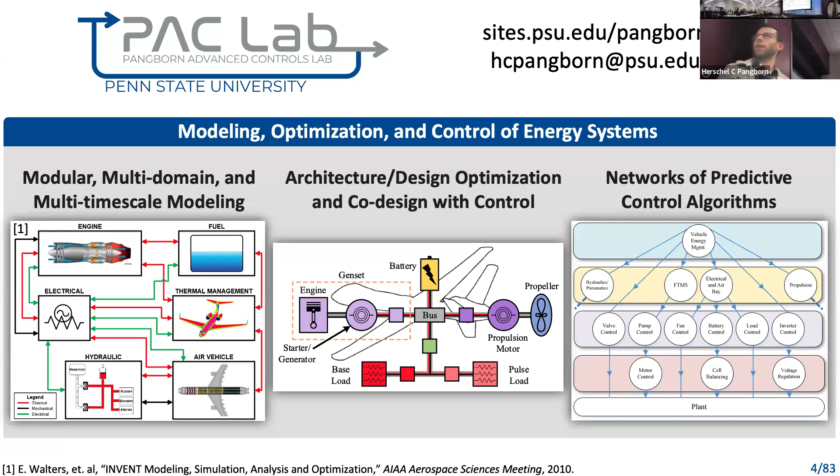We often find that these systems are so complex that we can't just have a single control algorithm that makes all the decisions for all the actuators. That's where we have hierarchical control approaches that take networks of algorithms integrated together to collectively make decisions. On the modeling side, a technique we found particularly useful is graph-based modeling. Think about a system like the one in the top left, a hybrid electric aircraft propulsion, power, and thermal management system, a notional architecture.

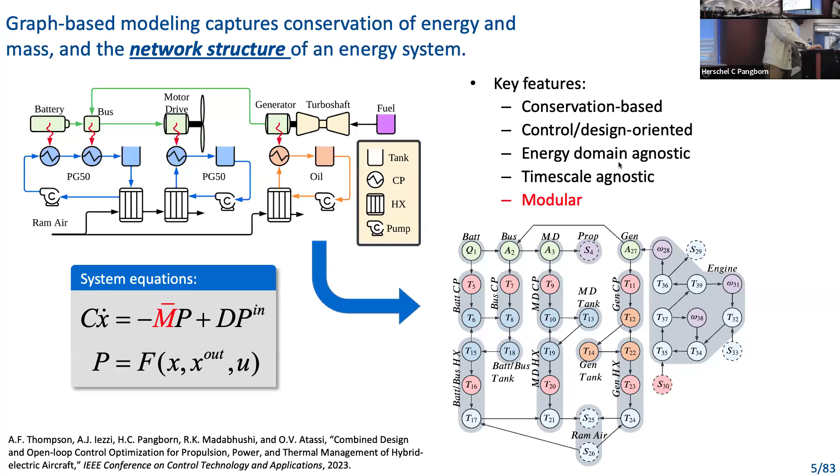Anywhere you store energy, you put a node in the graph, and anywhere you transfer energy, you put an edge. That energy could be electrical, mechanical, thermal. It doesn't really matter; conservation of energy applies in the same way. Then we get this nice network equation that describes how the energy is stored and transferred in the graph. That red matrix M is the incidence matrix that tells you about the structure of interconnections. We can exploit this knowledge of both the system dynamics and their structure in a number of really interesting ways.

We do apply control to these systems quite a lot. A lot of what we do is model predictive control. I won't talk about that too much because most of you understand how MPC works. You take a dynamic model, linear or nonlinear. You define a cost function; when the cost function is small, the system is performing well, whatever well means. You define inequality constraints on what safe operation looks like. Then you solve the minimization problem subject to the model and the constraints. And we use this to control energy systems.

Here's an example. This data was actually taken here at Purdue. When I was a graduate student at Illinois, there was a center here that we collaborated with, run by Tim Fisher. So I drove the 2 hours or so over here, right?

We popped an MPC controller on this test bed that was down at Zucrow Labs at the time, got some really nice data that showed that MPC worked well. That's the fastest I've ever gotten a controller running on hardware. So you must all have good luck doing that here, because it has not always gone as smoothly for me in other places, but it worked nicely.

So what you're seeing here is we have a heat load as a disturbance to a thermal system, and we're controlling a flow rate to cool the system off. And when you use a conventional controller, you basically wait until the system starts getting hot, and then you ramp up the pump, and by then it's too late to avoid a really severe temperature excursion beyond a limit.

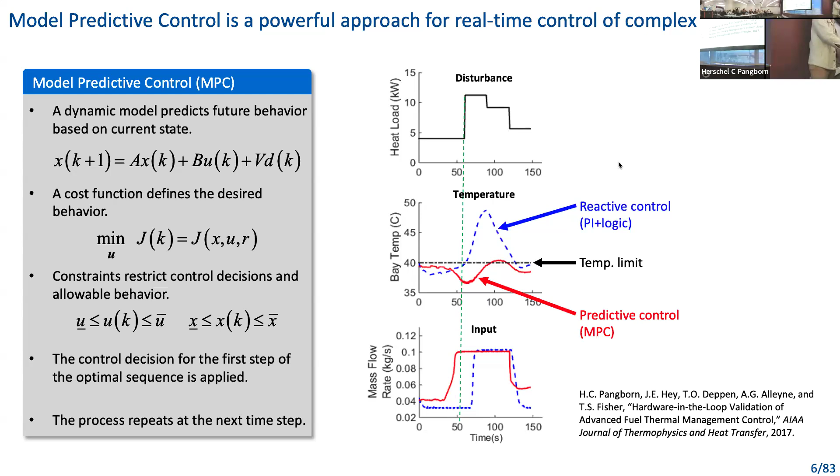But if you use predictive control and you have some expectation that that load is going to come, then you can ramp up the pump in advance, pre-cool the load, and do a much better job of respecting the thermal constraint. Another thing we've been working on at Penn State is confronting the nonlinearities in these systems.

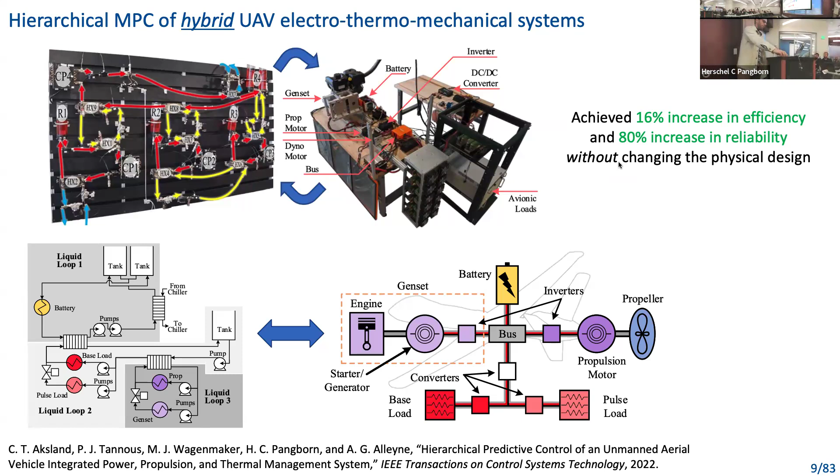And then here's the design one. So for this, we modeled a hybrid electric aircraft, and then we solved a co-design problem to both choose how to do the power split between the engine and the battery, as well as how to control the flow rates for the cooling systems. And we did those control optimizations together with sizing components. So we were sizing the battery, we were sizing the heat exchangers.

Obviously, bigger components help out with the power and thermal management, but they also have a mass penalty, so then it takes more energy to fly the mission plan, right? So we looked at some different configurations, basically looking at different efficiencies and energy densities for batteries, looking at trying to penalize fuel expenditure more than consuming other energy. And you can basically see how for different model assumptions and different objectives, the optimal design changes.

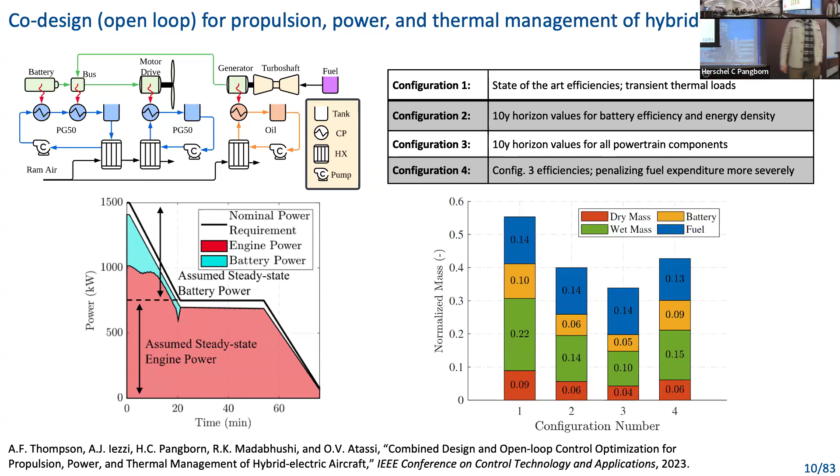All right, so that was a quick overview of the things I'm not going to get into further detail on with the talk.

What I really wanted to focus on is this theme around set-theoretic methods for safety-assured autonomy. So we'll talk about some offline verification of closed-loop systems. Then, as dessert, we'll talk about some online motion planning and show you some cool videos of robots.

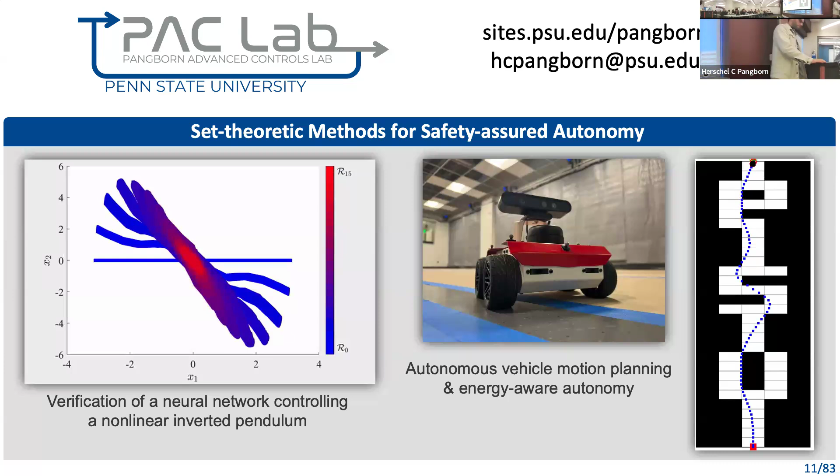So in terms of offline verification, I want to frame this in terms of reachability. So the idea of reachability is, imagine you have a dynamic system, right? Maybe it's a fixed-wing aircraft, like we have a cartoon of on the left there. And that system's going to leave from some initial set, any point in that initial set, and you'd like it to get inside of some target set. And along the way, there's some unsafe set you want to stay out of, and maybe some bounded disturbances that can hit you along the way.

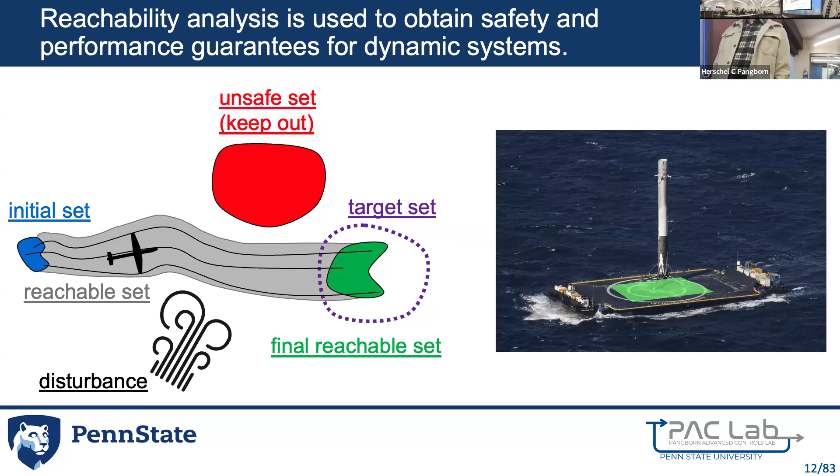And so the idea of reachability is to basically calculate the tube of all trajectories that the system will follow, right? And that's that gray tube that you see. And ideally, you'd like to be able to prove that your system is safe, meaning that you don't enter your unsafe set, no matter what the disturbances are. And you'd like to have some proof of performance that you get inside of some target set, right? Your final reachable set is inside some maybe landing zone.

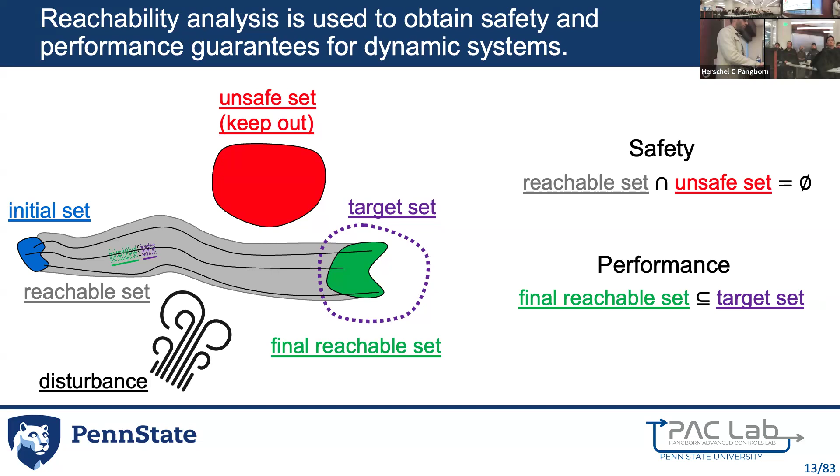And one way to approach this, and I think this is the most common that one might use conventionally, is you just run a ton of simulations, right? You hope that if you run enough simulations that if there was anything that was going to be unsafe, you would see that in one of the simulations, and then you'd know. But of course, this is not exhaustive, right? Just because you haven't found a simulation that's unsafe doesn't mean some other one doesn't exist.

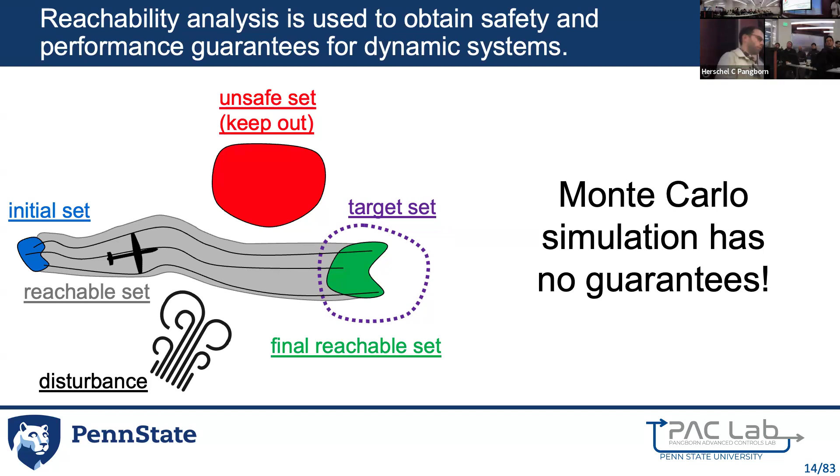And there are certainly other ways of doing sampling and stochastic approaches that might be able to provide some probabilistic guarantees, but just kind of blindly running a bunch of simulations is not a way to verify safety. So instead, what we want to do is calculate sets that bound these trajectories. And so here's an example of forward reachability. So we have some nonlinear system in discrete time. The state update is given by a function f. It's a function of states, inputs, and disturbances, where the inputs and disturbances are bounded.

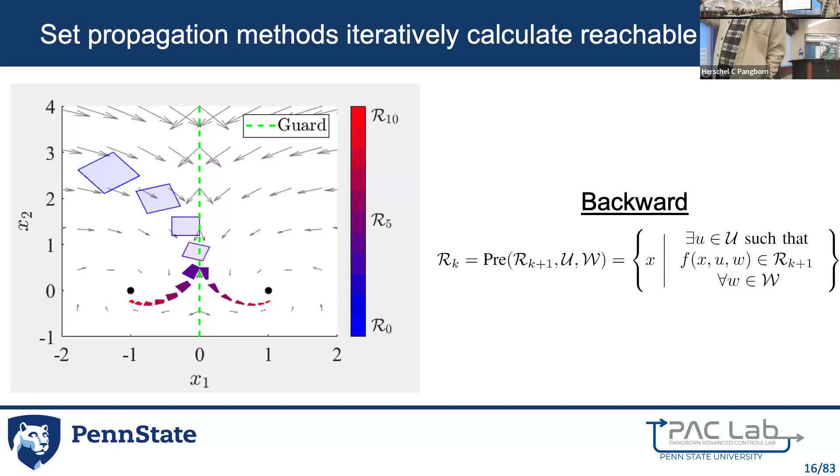And if you can do this forward, you can do it backwards as well. So I can define a predecessor or precursor set, where now I start in the set at step k plus 1, and this maps me backward in time to the set at step k. The way you handle disturbances and inputs here is a little different, but you can get the intuition behind it. You see in this case, if you start close to the equilibria and then go backwards, it turns out you can actually reach those equilibria from either side of the guard. So you get a bigger set in this case when you go backwards than when we went forwards.

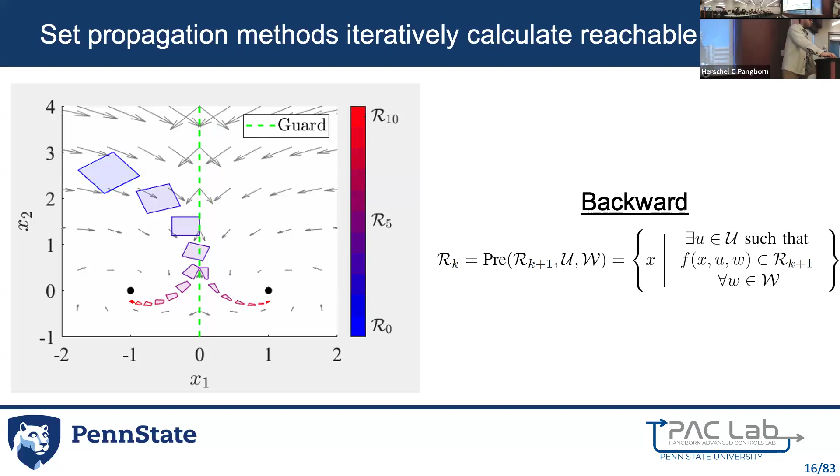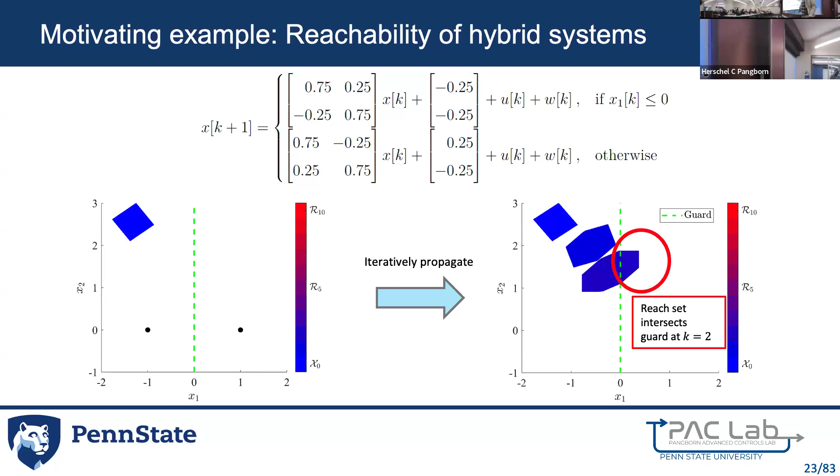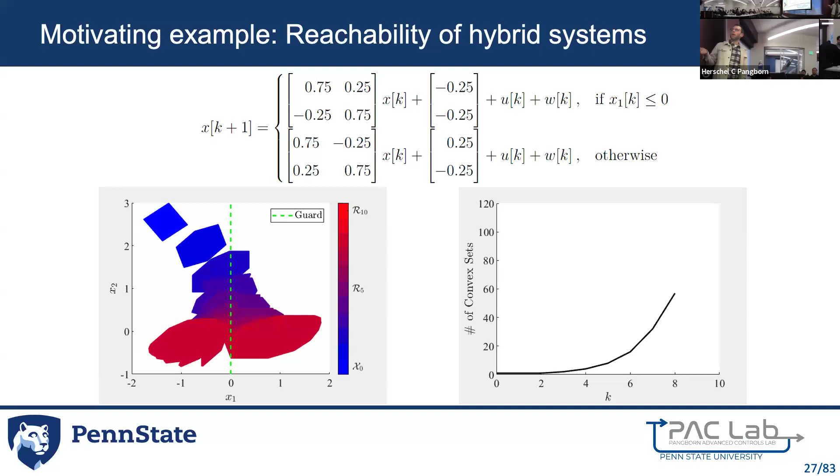So what do you do? Well, one thing you can do is you can just basically split it into two pieces and propagate each piece separately, right? So now we have two sets to keep track of, and we propagate both of them. But unfortunately, both of them cross the guard the next step. So, okay, we'll split them again. Now we have four to keep track of, and we'll propagate them again. And you can kind of see the problem, right? The number of sets I have to keep track of grows exponentially. So I have to store all those in memory, and I also have to propagate all of them through the dynamics every step. So it starts to affect both my memory and my computational complexity.

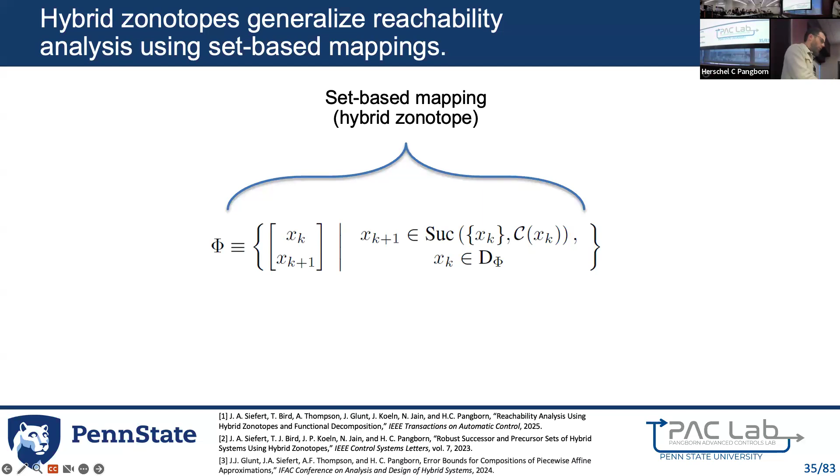All right, so how do we do all these things? Well, the key that we found is really useful is to think about building hybrid zonotopes as mappings of dynamic systems. So for example, we could take a particular system and define this set that basically stacks states at step k on top of states at step k plus 1, where the ones at k plus 1 are the successor set of some system, potentially with some controller in the loop, and that's valid within some domain. So through its dimensions, this set would basically map you from one step of a system to the next. And this could be an open loop system or closed loop. I'm showing a closed loop formulation here, but that's not required.

And what's nice is once you have that set, you can use these really efficient set operations to actually perform the reachability analysis. So I can take some initial set of interest at step k, do a generalized intersection with my map, and then a linear mapping onto the dimensions at step k plus 1, and I can see where that set will go at the next time step. And these operations actually scale linearly with the dimension of the system, and as you go, you build up more memory complexity in the set, but that scales linearly as well. And we can do some order reduction along the way if we want to try to combat that.

What I'll show you in a couple slides is how we can handle higher dimensional systems by doing some clever things with functional decomposition as well, right? So that helps to support scalability.

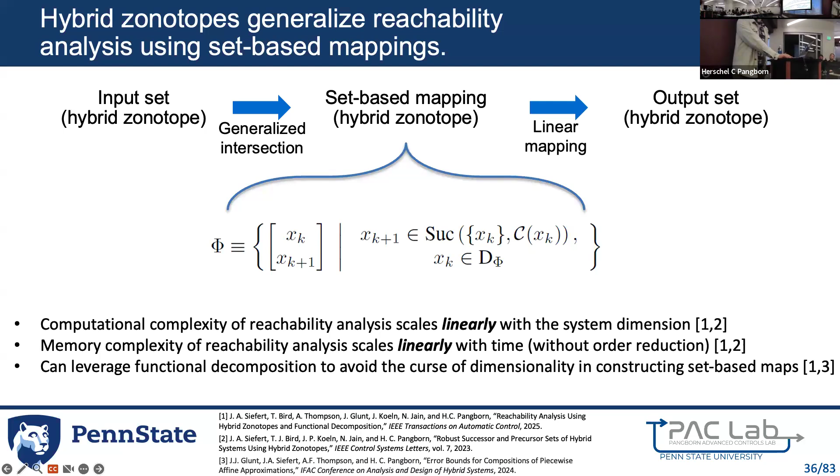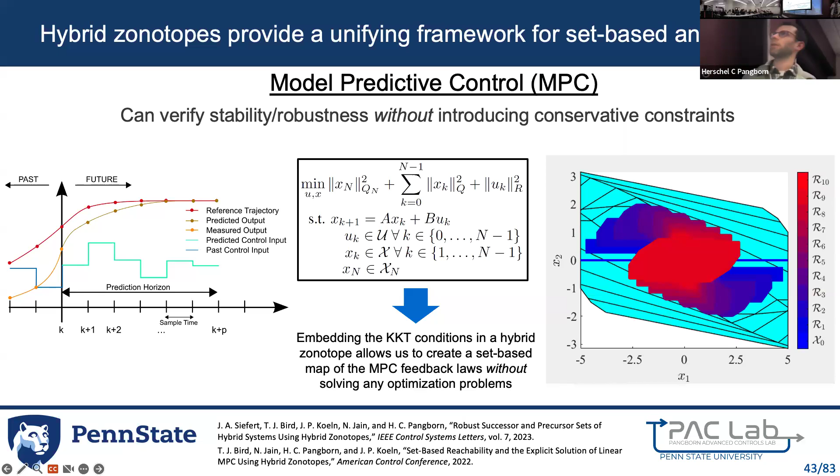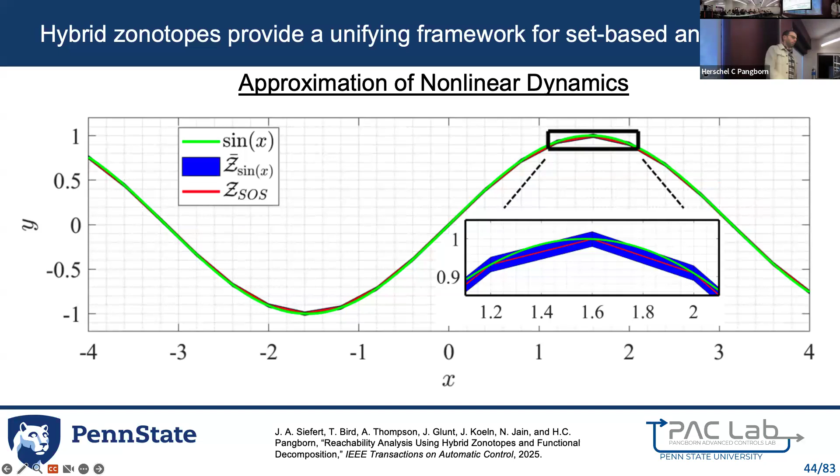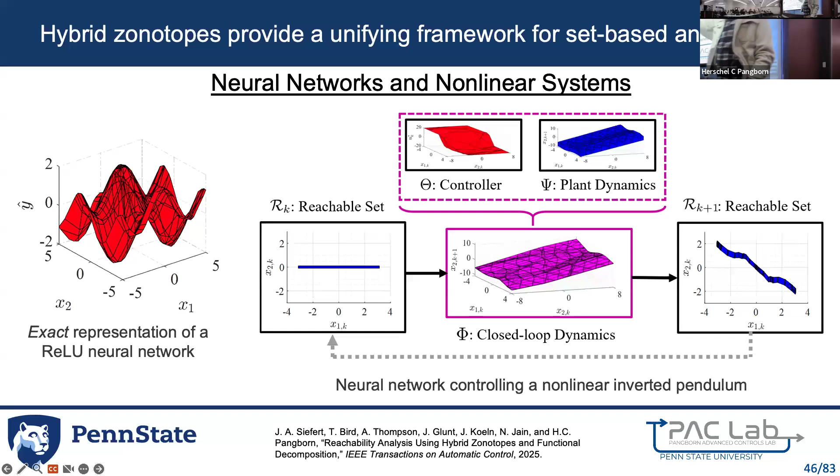So to show that in action, we'll take a classical control systems example of an inverted pendulum. We trained a neural network to mimic nonlinear MPC in stabilizing an inverted pendulum. We built that set mapping for the pendulum itself as a function of the control input. Then we took our trained neural network and expressed that also as a hybrid zonotope. Again, in this case, we used a ReLU neural network, so we could represent the set-based mapping of the controller exactly. Then you can couple those two maps together into a map for the closed loop dynamics, do reachability of this closed loop system, and see that the pendulum actually is nicely stabilized to the origin. This propagation in every time step takes about 5 milliseconds.

But then again, if we want to analyze the set, we have to confront the mixed integer optimization. So, for example, if I just want to bound it in a particular direction, solving that takes about 2 seconds.

It turns out that this neural network stabilizing an inverted pendulum is actually a benchmark problem for this friendly competition in reachability analysis called the ARCH competition. Basically, it's a series of benchmark problems. A bunch of folks all over the world get together every year, try taking their tools and solving these benchmark problems, and then write up a nice report that compares how they performed. So we solved that benchmark problem.

What we found that was interesting is if we use a really small initial set for the pendulum, the other tools that solve this benchmark actually tend to do better than ours. Our proposed method for a small initial set took 312 seconds. I should say all these numbers are seconds. But some of these other ones take half a second or less. But if we make that set bigger, our approach still works, and the other ones all basically explode. That's because they're just not able to get a tight enough approximation of the pendulum dynamics.

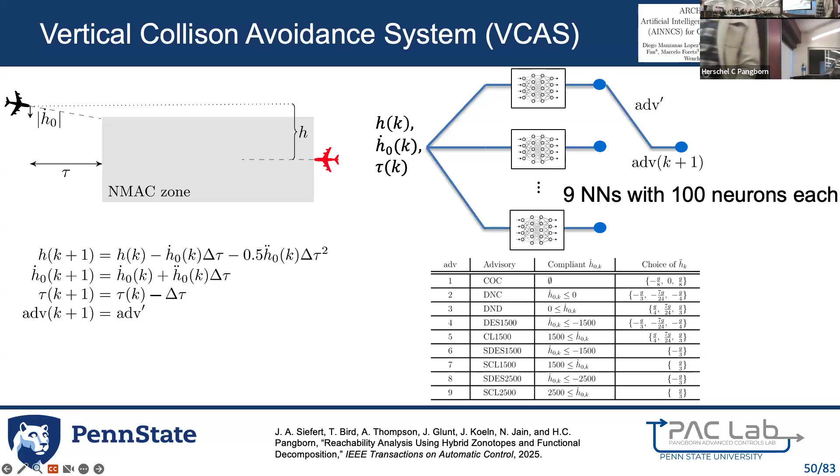So there's 9 neural networks, each of which has about 100 neurons, and those are providing a set of advisories. They're basically voting on advisories, and then one of those neural networks wins out. And then once the advisory is selected, the pilot has a set of choices that they can make about how to fly the airplane. So this is a combination of neural networks and also some logic, and some uncertainty in which choice the pilot might make.

And we are able to show in less than a second that, in fact, this system is unsafe, and it'll violate the requirement on the separation distance between the aircraft. And we do this again by building one of these set-based mappings that captures all these things. Because hybrid zonotopes are nice and generalizable, we can capture the neural networks and the logic and the system dynamics all within the same representation.

The other tools that have tackled this problem don't have that same level of generality. And so they have to break the problem up into smaller pieces and handle them separately.

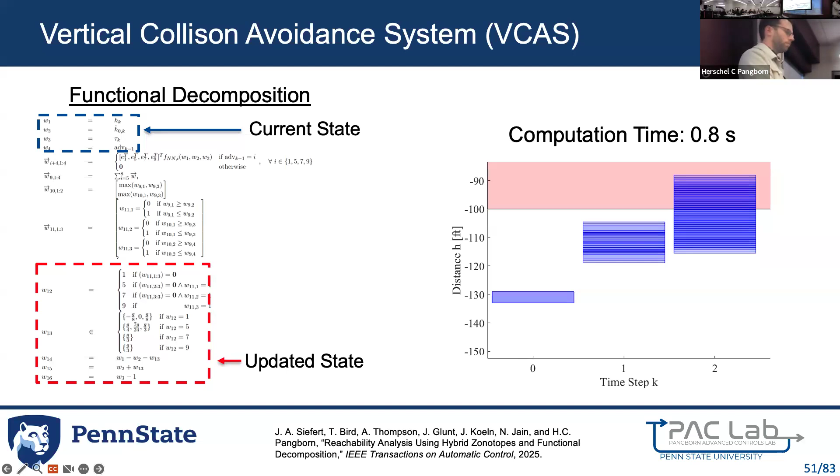So that was all offline verification. About a year ago, I started thinking about whether we might be able to use this online in some useful way. So offline, you don't necessarily care how long it takes to compute things. As long as you can get an answer, that's fine. But online, the goal is to see if this can accelerate the speed of decision making or solve problems online that we wouldn't be able to solve otherwise.

And we thought a little bit about what a good particular application to start with might be. And we settled on motion planning for autonomous vehicles. So you think about a vehicle driving around, trying to avoid obstacles. Those obstacles form a non-convex obstacle field. So other cars on the road, or some other obstacles on a map, that creates non-convexity.

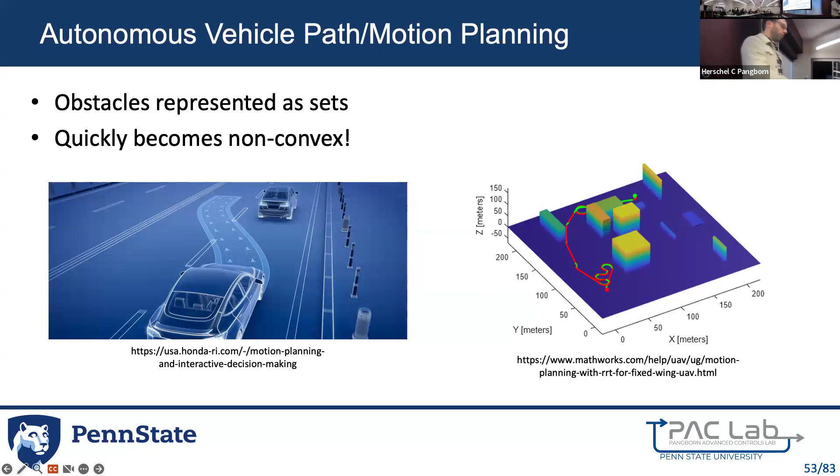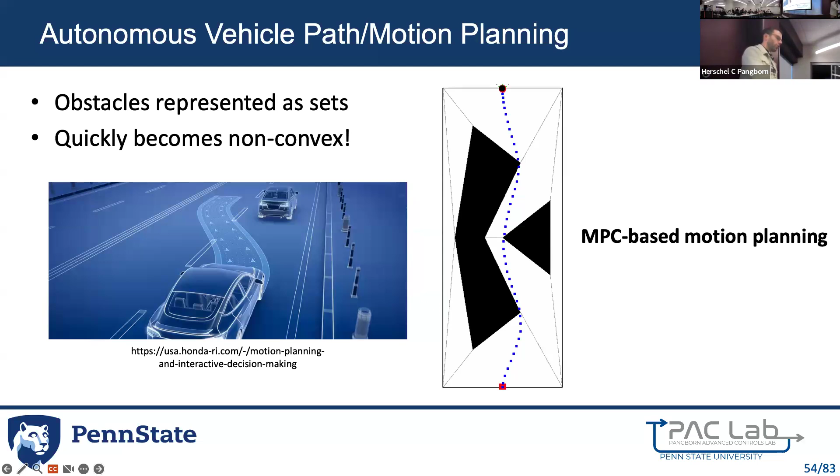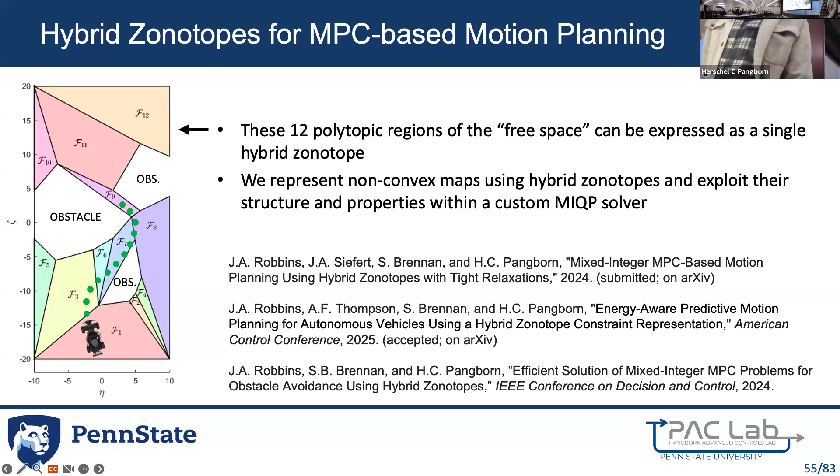So let me walk you through this. So again, what we do is we find basically the free space where you're allowed to be. We represent that as a single hybrid zonotope. And then we wrote our own custom mixed integer program solver that exploits the structure of how this optimization problem looks when you use hybrid zonotopes. And so we've written a couple papers on there. One was in CDC late last year, and the other two are on arXiv if you want to check them out.

Another really common map representation is occupancy grids. And so in this case, you just grid up the space. And any one of those grids that has anything in it, you say is a no-go zone. And then you're left with the grids you're allowed to be in. What's nice about this is that no matter how big the grid is, you always just have two continuous factors and one equality constraint. And then just the number of binary factors will change as you have more cells that you're allowed to be in. So we can represent these grids super efficiently as hybrid zonotopes.

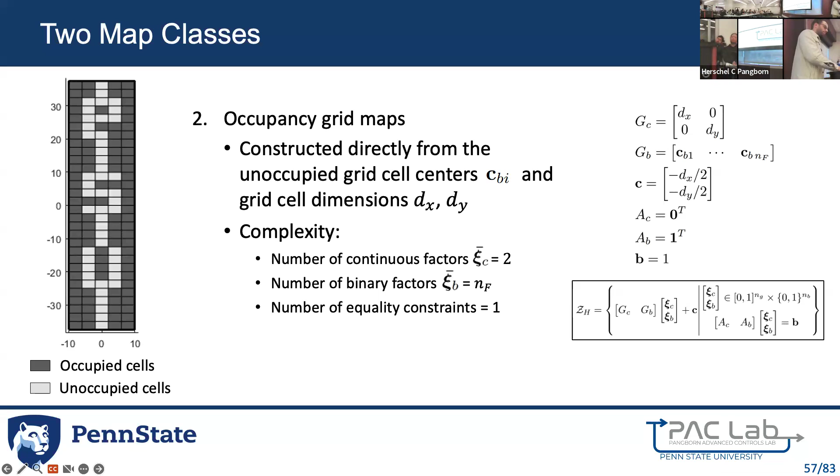Now, what's, again, really nice about these hybrid zonotopes is that when you put them into mixed integer programs, the way that branch and bound works is it relaxes binary variables, right, and then solves quadratic programs subject to that relaxation. And when you do that relaxation, if you get a tight relaxation, then you get a nice bound in your quadratic program subproblem. But if you get a coarse relaxation, then you get a coarser bound, and it takes longer for the overall optimization algorithm to converge.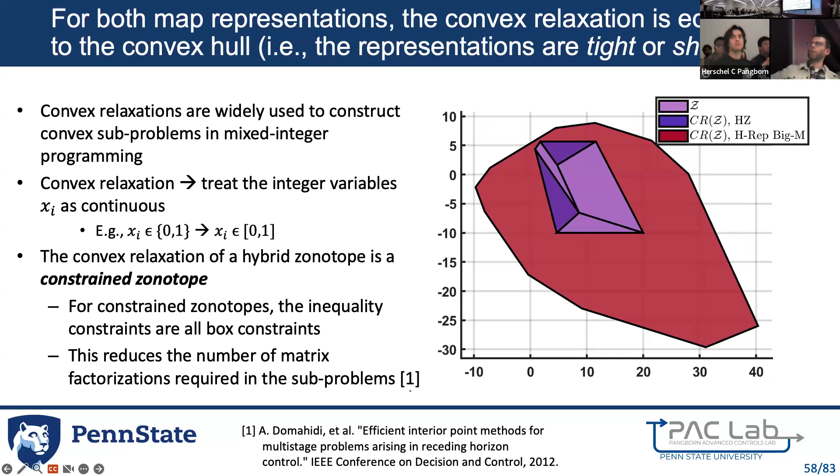If you use big M, which is a more conventional way of taking unions over convex sets, when you relax that, you get this massive red set, right? And that, again, leads to a much worse bound inside of the optimization algorithm. The other thing that's nice is when you do that relaxation, you take your hybrid zonotope and it becomes a constrained zonotope. And then constrained zonotopes, right? The inequality constraints are just boxes. And that winds up benefiting you when you get to these quadratic subproblems. Basically, instead of having to do matrix factorizations, you get a diagonal matrix that you can easily invert. And so it makes the subproblems of the branch and bound algorithm go much faster as well.

Then the other place where we found some computational benefits was in leveraging the context of this motion planning problem, right? So you have a binary variable associated with each of the free space regions that the vehicle is allowed to be in, and you can kind of limit the sequencing of when those binary variables are going to become active just by knowing the topology of the map. So if I know the maximum speed of my vehicle, then I know I'm not going to jump from being in a region that is really close to me to being one that's really far away from me without having to take a couple time steps in between. And so we can constrain the branching just based on the region to region reachability of the vehicle.

And this is not like a dynamic reachability like we were talking about earlier. Here, when I say reachability, I literally just mean bounding the vehicle speed and then looking at the shortest path, both from one region to the other and also from the vehicle to the different regions, right? So we use that basically within the heuristics of the branch and bound algorithm to get some further computational benefits.

So I'll show you examples for 5 different maps, right? The one on the left has some convex obstacles. Then the next one in has a non-convex obstacle. Then we have a grid that happens to spell PSU for Penn State. Then we have this one where we have hard obstacles, but we also have regions that you can be in, but at a different cost. And I'll talk about that more in a second. And then to show that we can do 3D, we have a 3D grid. And here we're showing an MPC algorithm planning for all of those. The vehicle is the kind of black dot that's moving, and then that trail of red circles is the prediction horizon.

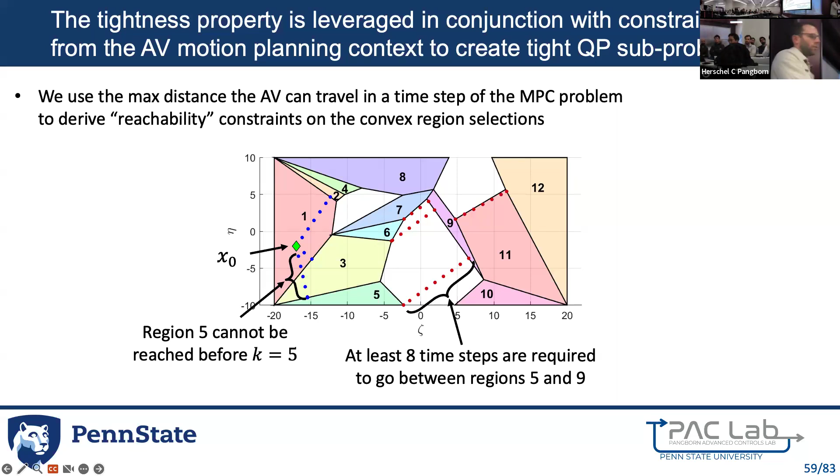You know, yeah, you know that before you start planning. Sure. Yeah. I'll show you an example where that's only partially true in a second.

So for these maps, basically, here's the computation times. The top set of bars is average solution time. The lower set of bars is maximum solution time. This is implemented on a desktop computer with a 15-step horizon. And then each set of bars going across is one of these different maps. So our methods are towards the left, with and without a warm start.

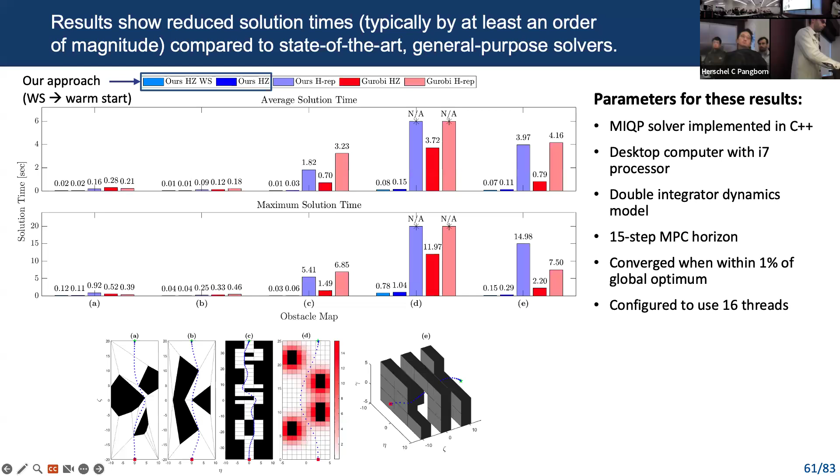And then on the right, we're using Gurobi, which is a commercial solver that is free academically, but quite expensive if you have to buy a commercial license. And we are, in some cases, 100 times faster than Gurobi, which was surprising to even us, right? Because Gurobi is a really highly optimized commercial tool.

And this tends to scale really well with the prediction horizon of the controller as well. So here we're just increasing the horizon from 5 to 10, then 15, then 20 steps. And you can see ours goes from below the rounding error, right? So the fastest one is 0.00 seconds. Obviously, it's not 0 time, it's just being rounded off. And then when you make the horizon 4 times longer, now it's 0.01, right?

Whereas you can see that Gurobi is increased by more than an order of magnitude. And I think, in fact, this one actually is just getting cut off because it's taking so long. Or maybe just the bar is getting cut off because it was out of the range.

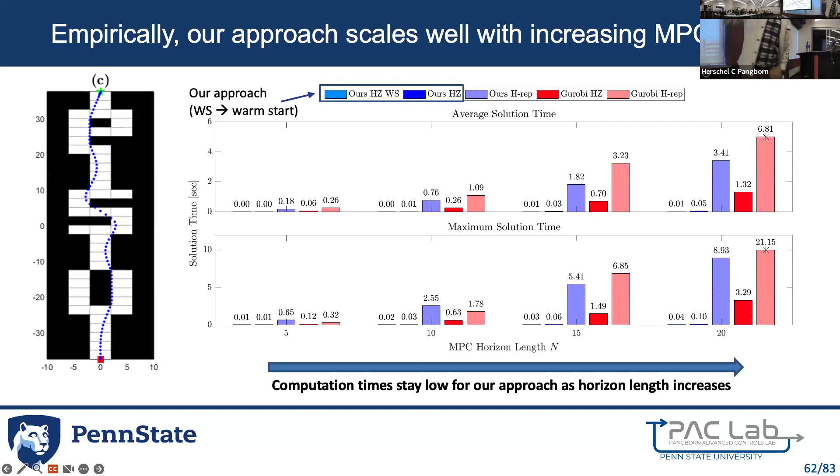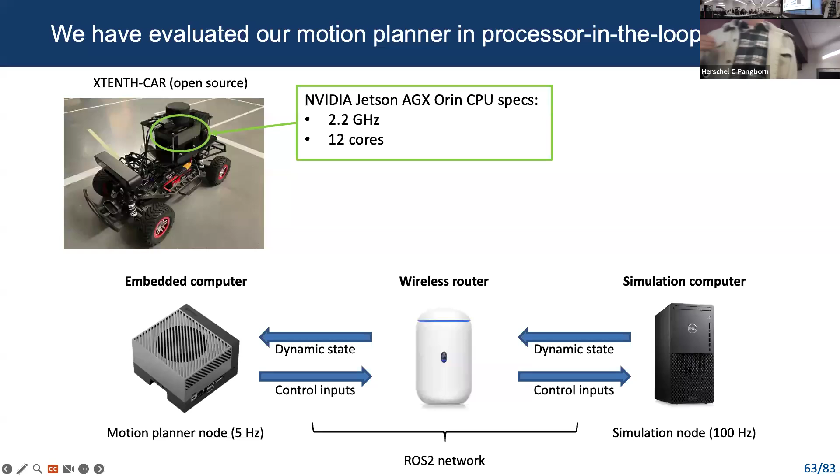We wanted to see how this would work on embedded hardware. So we bought an NVIDIA Jetson. So this is a pretty powerful embedded machine, but it fits on a robot. And in this case, we are just simulating the vehicle. So we're doing a processor-in-the-loop test, running a controller on the embedded machine, and then simulating it on a computer implemented in ROS. And this runs reliably at 5 Hertz with our ROS2 implementation; our solver is in C++.

And we get slightly different trajectories because we're basically capping, we're just getting the best solution we have after a fifth of a second. But the differences are basically negligible. Like, this obstacle in the U, you go around it to the left or to the right, it actually doesn't matter, right? So it's not a big deal that we're terminating the optimization a little early in that case.

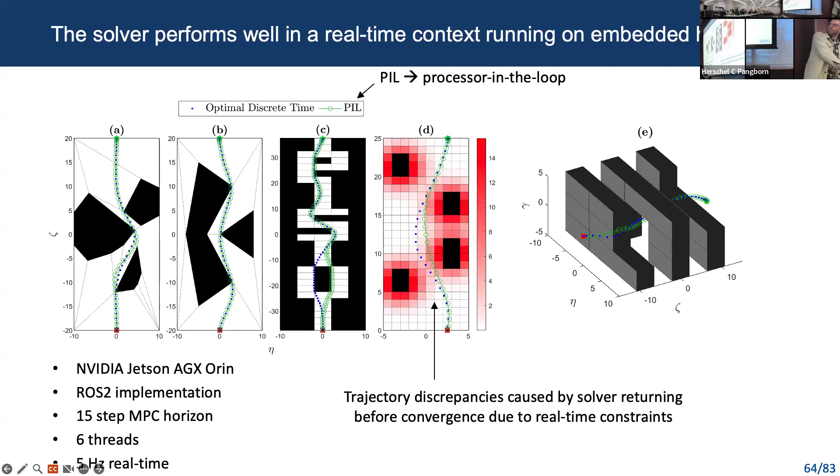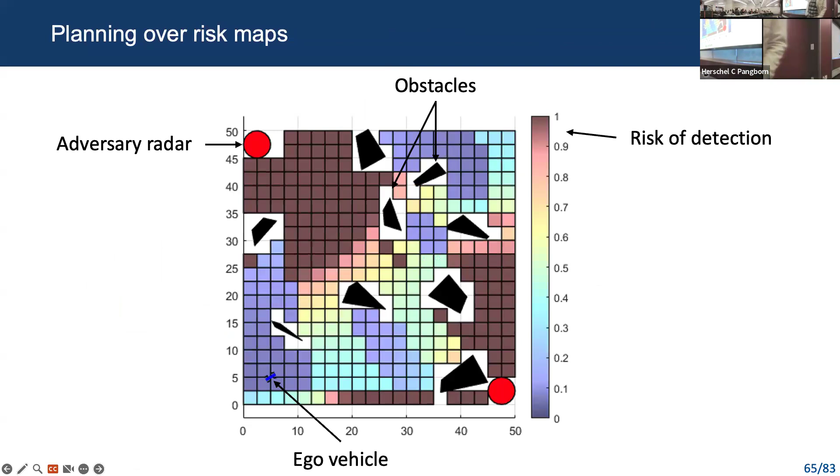I mentioned earlier that we can handle these cost constraints. So you could imagine maybe you're trying to avoid some adversary that has radars, and as those radars propagate through your field, they get kind of shadowed by some obstacles, and so you could map out regions that have different costs of being detected by an adversary.

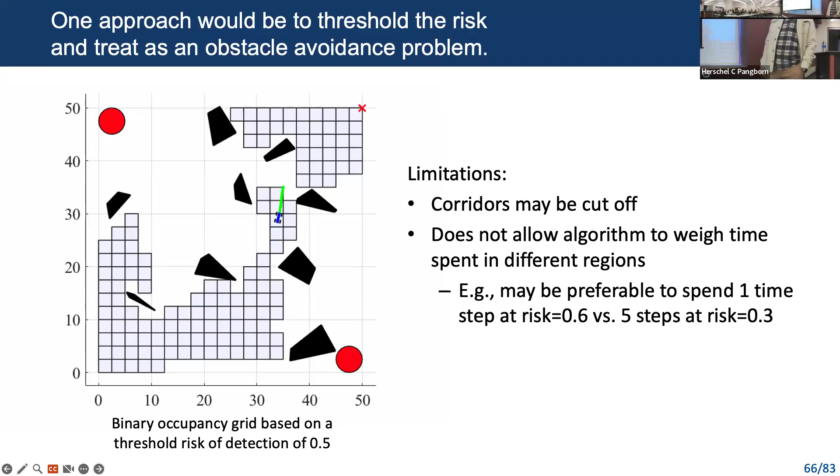And one approach to solving this would be to just threshold, right? Regions that have above some cost, I'm just going to not go in those regions at all. But then you could wind up cutting off corridors completely, where now you can't get to your destination at all. And also, then you don't have that understanding of how spending maybe one time step in a high risk region would be different than spending more time steps in a lower risk region.

So instead, we can just associate a cost with binary variables in that map being active, because each region has its own binary variable, right? So we can do that very easily, and then we can plan through these maps that have basically spatially varying costs of occupancy.

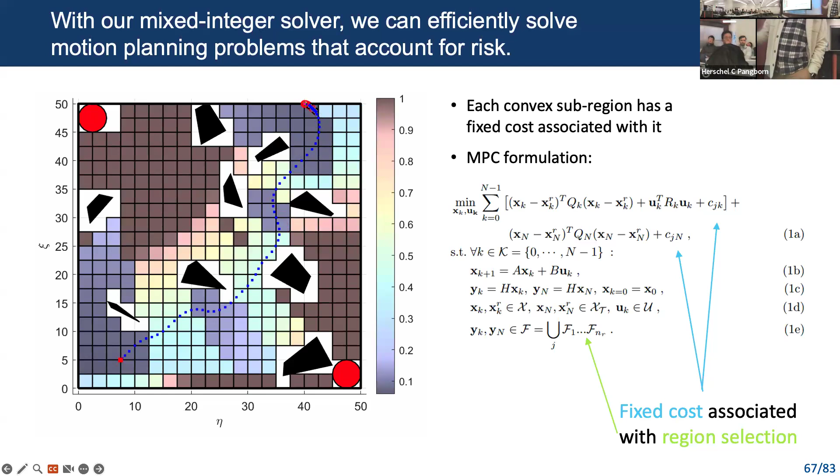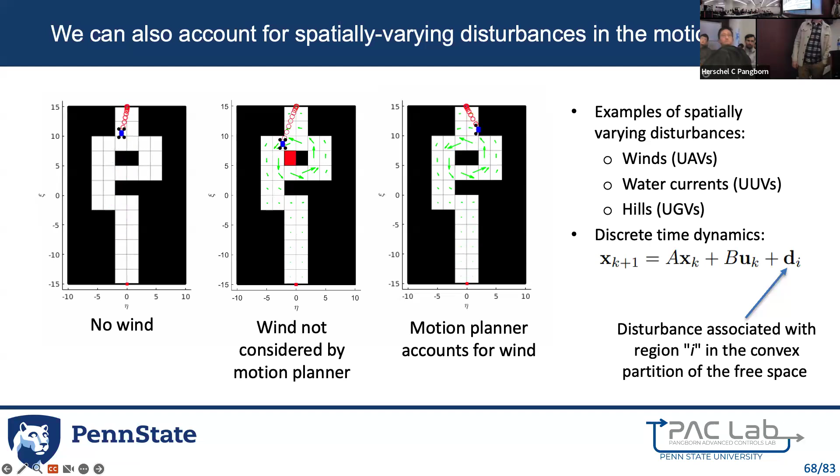So that covers basically hybrid costs and hybrid disturbances. What about in the model itself? That's like the third piece of MPC, the model. So to handle that, we actually built a hybrid vehicle, and this connects nicely for me because I like energy systems. So here we have just a unicycle model of a vehicle.

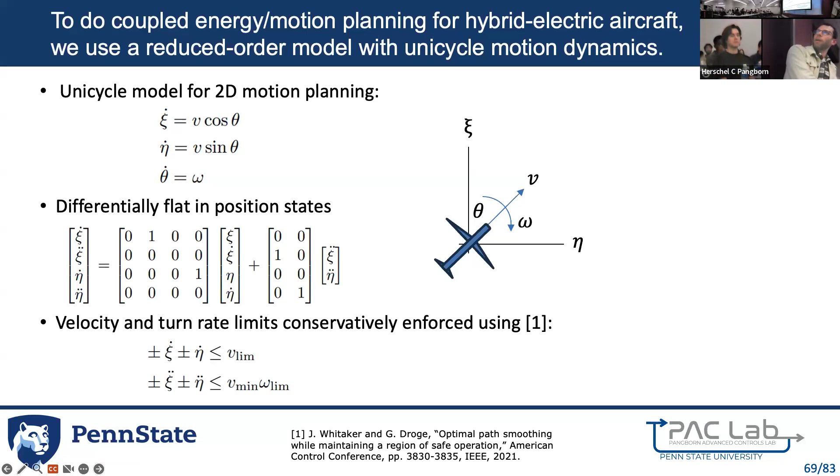It turns out that model is differentially flat, and so we can still use a linear prediction model in the MPC, right, in the position states. And then we model the powertrain of this as just a very simple representation of a hybrid vehicle.

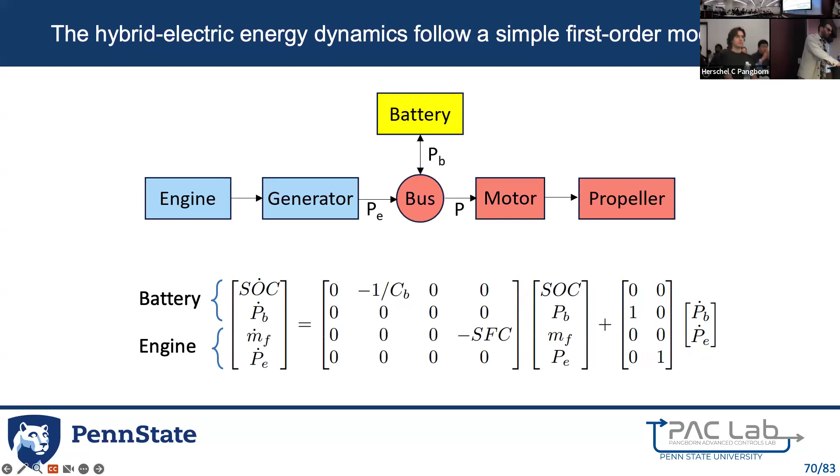So we have an engine and a battery, and you can pull power from either, and you can use the engine to charge the battery and then drive a propeller. And then we coupled the motion states to the energy states. I know I'm going over this quickly, but the paper is out there if you want to see it, with kind of a conservative way of tying those together.

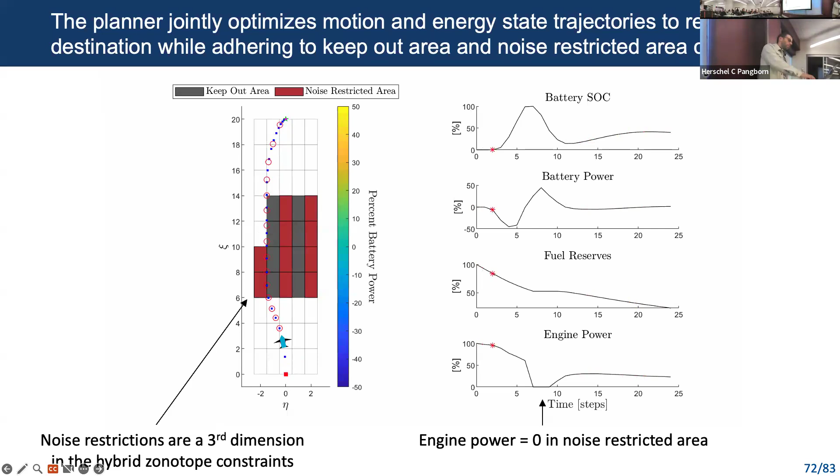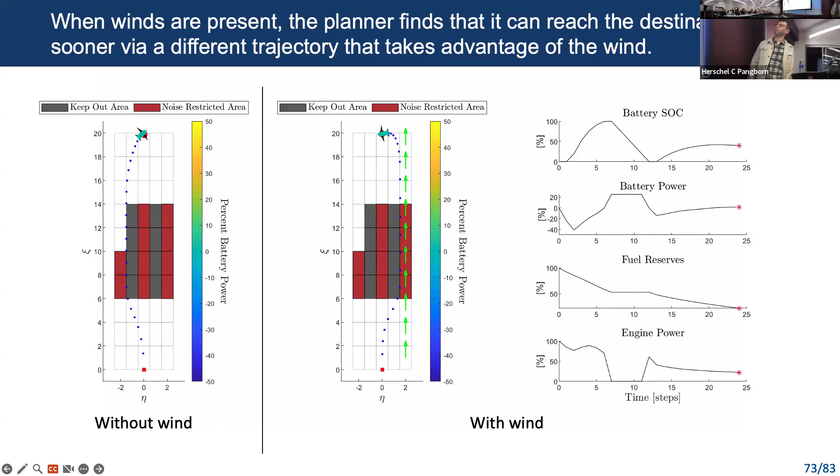And then we can do these things in combination, right? So now we have noise restricted areas and we also have wind. And so we leverage this wind pattern to the right because now we can get through the noise restricted region even faster when we can take advantage of the wind. So we can add all these different features together on top of each other, right?

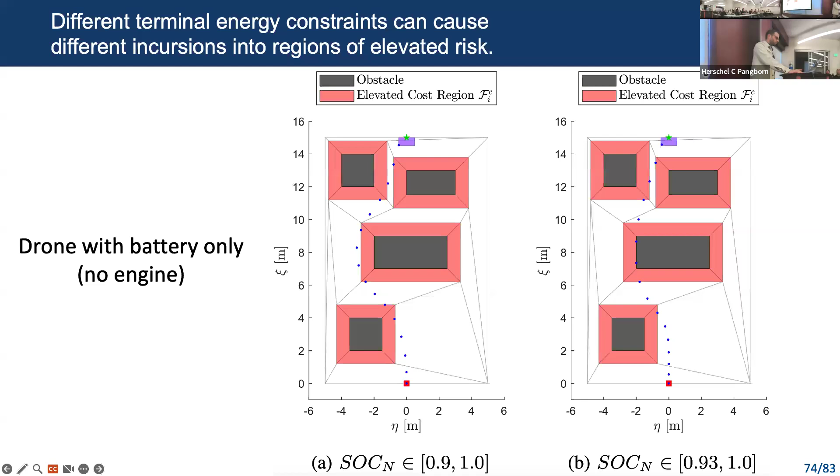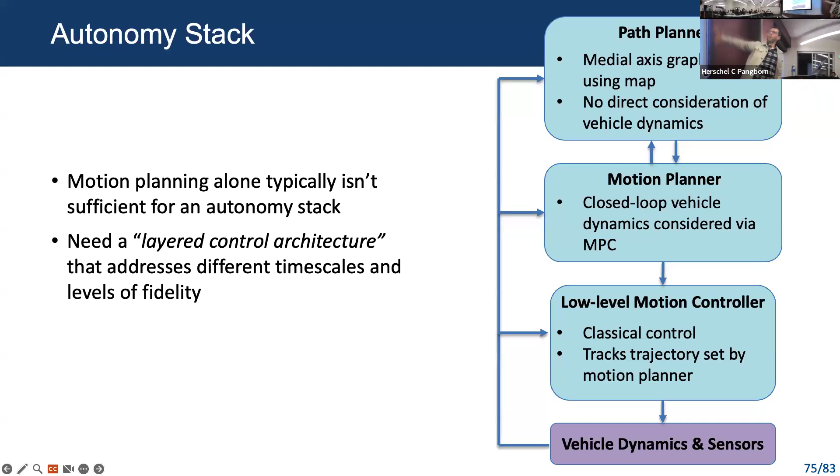So this is great as a motion planning level of a control framework, but that's typically not enough to do autonomy, right? In an autonomy stack, you typically need some kind of long-term path planner. I think of that as being like if I want to drive somewhere, I need Google Maps to tell me where I need to go in the long term, right? And then my motion planning when I'm driving a car, that might be me. And then I need low-level controllers under the hood, on board in my car. And so we built up an autonomy stack like this and put it on an actual robot, right? Some folks now are calling these layered control architectures, but they've been around for a long time.

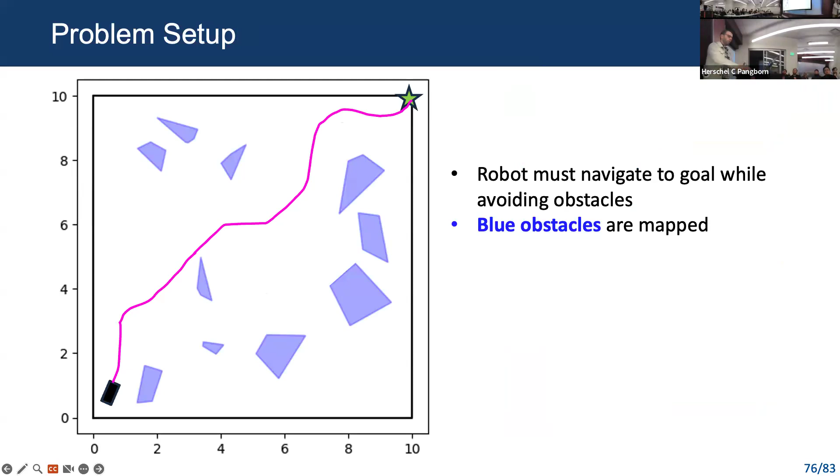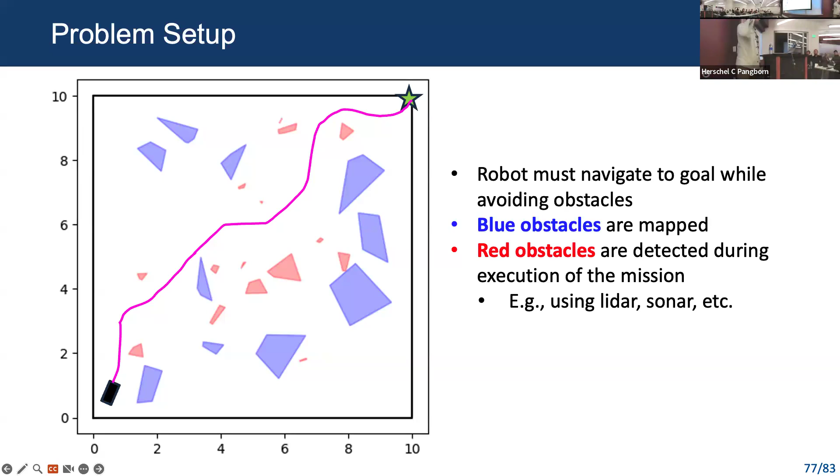So here's that highest level controller. It's a graph search algorithm, a type of algorithm called a medial axis planner. So it's in some sense trying to go through the middle of corridors around obstacles. And so here we'll have blue obstacles that are known about. But then we'll also sprinkle in some red obstacles that are not known to the graph planner. And so as you get close to them, that's when you would detect them, maybe using some LiDAR or sonar, right? And so if one of those red obstacles happens to be in the way of your graph search plan, then locally your motion planner is going to have to find a way around it. And that's what I meant earlier when I said there can be errors in the map.

So we implemented this experimentally. There's a brand new building on Penn State's campus called ECoRE, and we have a motion capture testbed in there. We've got an OptiTrack tracking system that we just got 2 months ago. So everything I'm showing is very new results, but it came together, I thought, surprisingly fast. And then we're using a particular robot called a ROSbot.

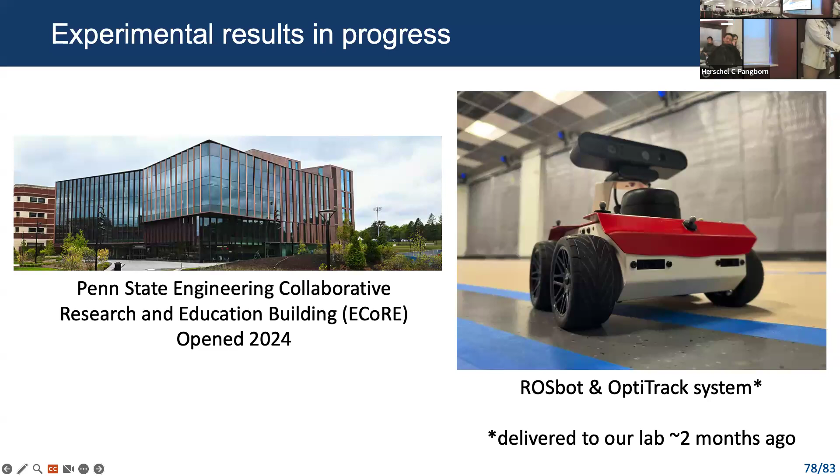And so here's the setup. This is basically the obstacles virtually overlaid over top of our robot. So again, blue obstacles are ones that are known to the path planner. The red obstacles are not known to the path planner, and that's why it goes right through one of the red obstacles. So we already know we're going to have to deal with that in the motion planner when we get to it.

And then this box here is basically the local map the motion planner sees, right? So it only sees the obstacles that are inside of this box. And the way it's staying on the long-term path plan is it's given a terminal set along the path that it has to reach by the end of its horizon. So we have a short MPC horizon that's trying to get to a point alongside of our longer term graph plan.

And if I play this video, you can see it works pretty well, right? So we're generally tracking the graph plan, but kind of rounding the corners in it when there's no obstacles. And then the graph search algorithm asks us to go through an obstacle. We see that it's there and find a nice way around it. Right? And you can see that the terminal point kind of moves fast or slow sometimes. We're still refining our heuristics for how we pick points along that path plan, but it works out.

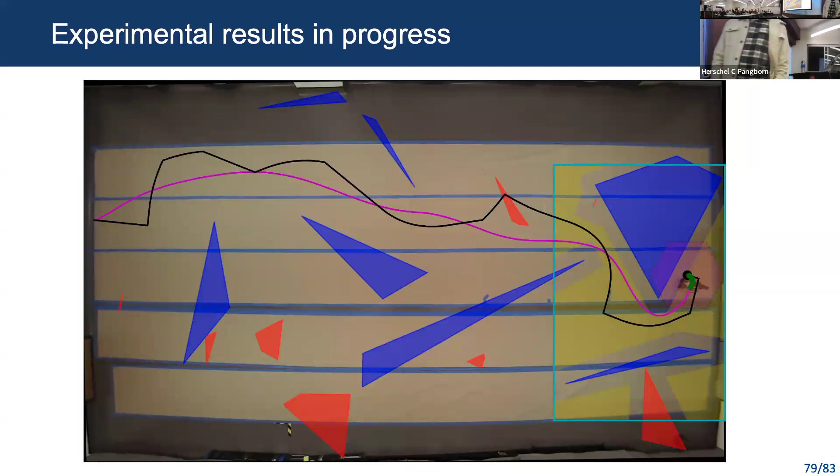Now, what's neat is sometimes you reach points where they're just not passable. So here, the graph path planner wants to go down here, but this corridor is completely cut off by a red obstacle. There's just no way to get through there. And so what happens is that terminal set is going to become infeasible, right? We're going to find that we can't track the path plan. And that actually is good. That tells us that we need a different plan.

And so when that becomes infeasible, we trigger the graph search algorithm to give us a different route that uses a different corridor. So you can see we get stuck behind this obstacle. And then bang, it triggered a new plan that used a different corridor. And then the vehicle turns around and it follows that plan instead. So we can actually use this to kind of detect local infeasibility of plans from the graph search algorithm.

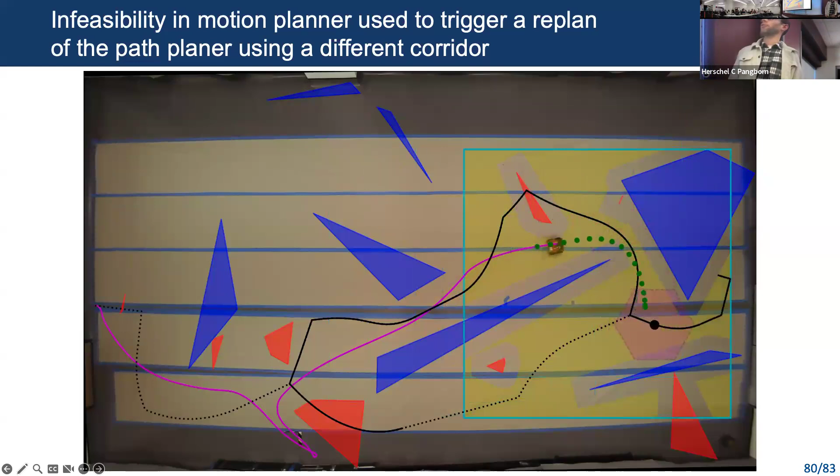And again, you can see it does a nice job of routing around obstacles, where the graph search algorithm, again, being a medial axis planner, is trying to go through the middle of corridors, but locally we know we can cut a little closer to objects.

So I think I have really 2 more slides. So a good question to ask as a control engineer always is, when you have a cool method, can you solve the dual problem? So the dual problem of model predictive control, I consider to be moving horizon estimation. So we were able to do that. So in this case, we have an aircraft flying, and basically we're trying to estimate our position using the terrain below. So we can sense the height of the mountains underneath the airplane, and we're trying to localize based on that information. So we took some terrain data from around us in Pennsylvania.

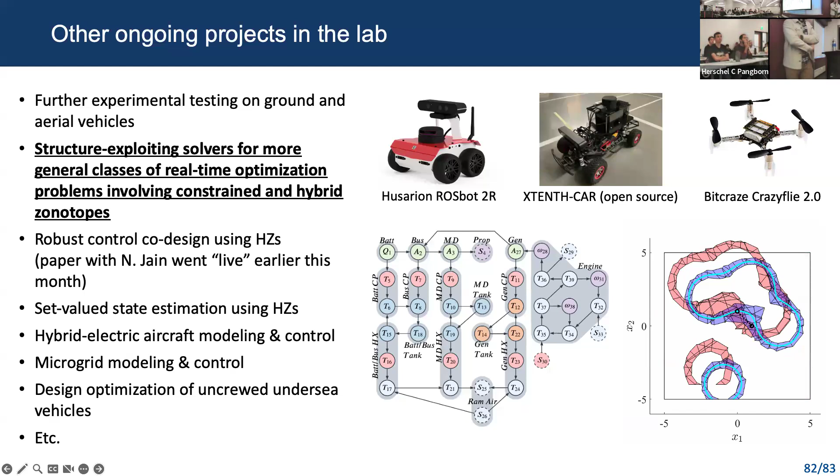We're doing robust control co-design, right? A paper that we co-wrote with Neera and her students is live as of early this month. So you can see some hybrid zonotope-based control co-design papers. Again, solving dual problems in estimation, and then all the energy system stuff involving hybrid electric aircraft, starting to do that for aerial vehicles, but now also ground-based systems like microgrids, and even undersea systems. So nice broad set of literature.